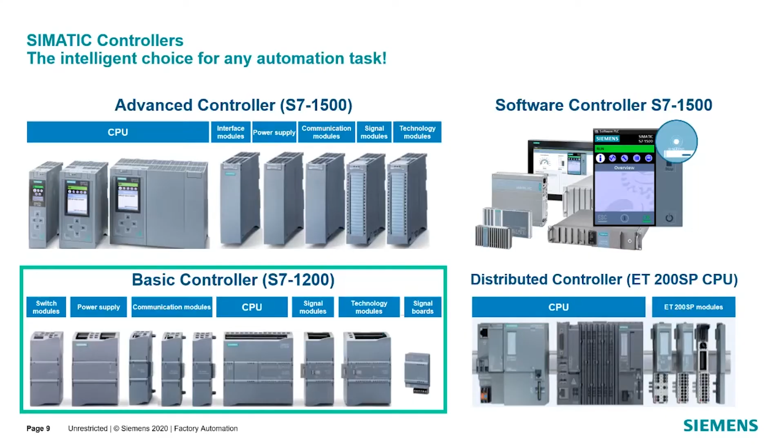Moving on to the key innovations that Siemens likes to focus on within their PLC family. We're going to real briefly talk about them here and then move on to a little bit more during the presentation. Main areas of focus include security, safety, and diagnostics and technology integrated into the platform through programming, the innovative design and compact size, and then most importantly with Siemens in the TIA portal, efficient engineering through the single engineering framework known as TIA portal, which is a programming environment for PLC, HMI, drives, SCADA, network, and smart controls.

When we look at where the S7-1200 sits in comparison to the other controllers within the Siemens controller family, it is on the lower end of the controller, but it comes at a very competitive cost point. Don't let it fool you. It is still a very powerful controller for its size and functionality. And it still goes down the path of the 6 features that Siemens likes to promote across their entire line. As you can see, it overlaps a little bit into the S7-1500 platform, and then you can see where the other 2 options fall within the 1500 environment.

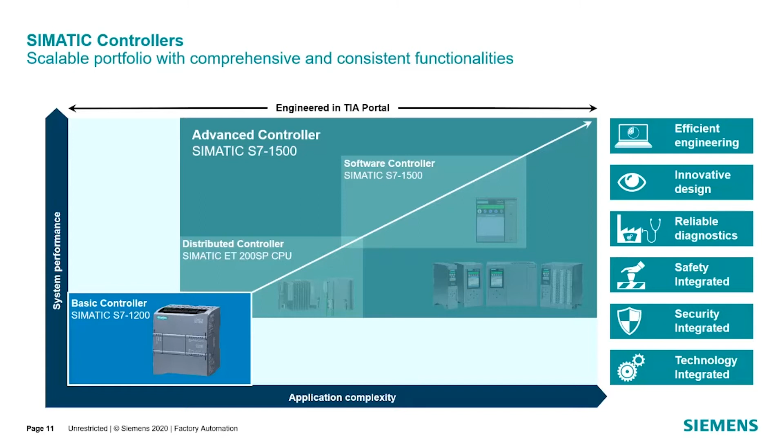Not going to go much into this other than to say that the 1200 is very versatile for a large range of market segments. It's extremely good for OEM environments, especially smaller machines that are not an extremely big amount of IO count, but it's also been used in applications from car washes and bowling alleys. One in particular I know that Siemens is proud of is it is the primary control system for Top Golf driving ranges, and it is what helps control all the systems at the individual stations.

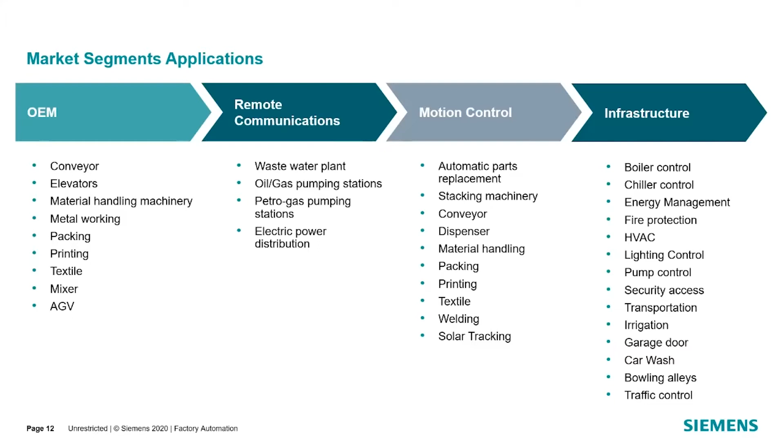Now, before we get too far into hardware, I wanted to just touch real quickly on the software for the SIMATIC controller platform. For the PLC side of it, the software is Step 7 in the TIA portal. There are two versions of it available right now. For the S7-1200 PLC family, Step 7 Basic would be all that you need. If you then step up into the larger controllers, whether it be the S7-300, S7-400, the 1500, or even the open or software controllers, then we would be looking at Step 7 Professional. I should also mention that Professional also covers the S7-1200 CPU. In addition, with Step 7 Basic and Step 7 Professional, you also get the HMI equivalent software, WinCC Basic, which is used to program the basic panel line of HMIs.

On all of these PLCs, just as there's Step 7 Basic and Professional, there is a safety equivalent of this for use with the fail-safe controllers. Safety Basic, once again, covers just S7-1200F processors, while Step 7 Safety Advanced covers the full line.

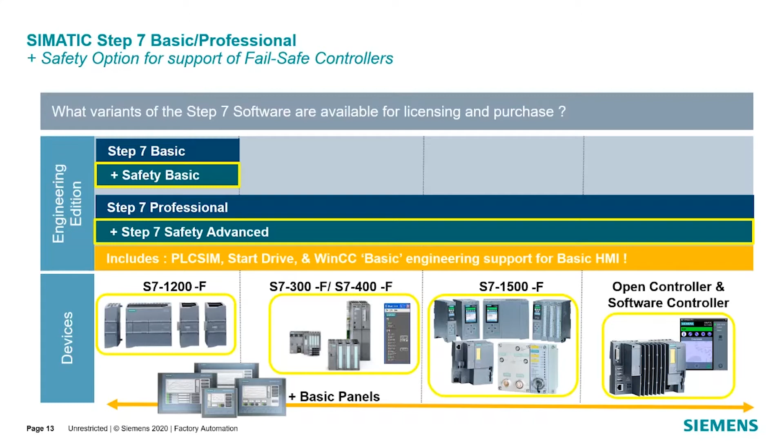When it comes to the design of the S7-1200 CPU, there are some features that are common across the entire family line. All of the CPUs have options available on the power supply, whether it be a 24 volt DC or 120/230 volt AC variant. The 120/230 volt AC variant actually has a small power supply in it additionally that will provide 24 volt for some field sensor supply for your IO.

All of the 1200s have a slot on it for a SIMATIC memory card. With the 1200, this card is completely optional compared to its big brother, the 1500, where it would be required. With the 1200, this can be used to expand the load memory of the PLC, or it can actually be used to store additional files and uses for things like the web server. And we're going to see that a little bit later during the live demo.

Additionally, the 1200 CPU has a trio of status LEDs for CPU status, including run, stop, error, and maintenance. It has LEDs for each one of the integrated IO built onto the PLC. And it also has status indicators for the communication port on the PLC.

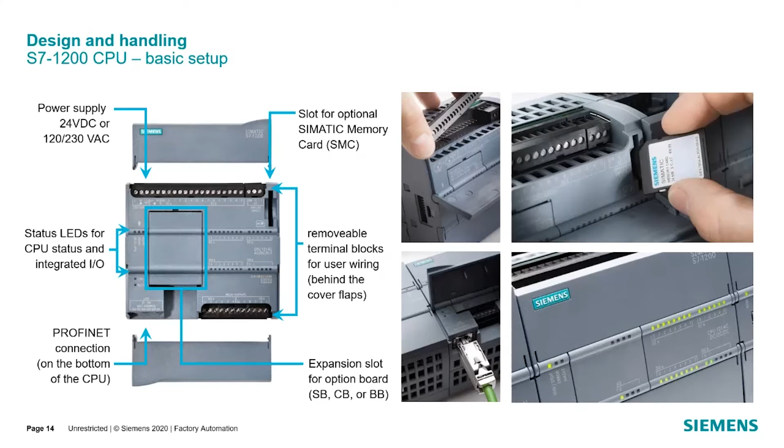And then finally, the 1200 CPUs feature removable terminal blocks that come standard in screw terminal, although push-in terminal blocks are now available for them that are conveniently covered behind cover flaps.

When it comes to variants of the S7-1200 CPU, there are five flavors that make up 13 versions of the processor. Majority of them, the 1211, 1212, 1214, and 1215 all come in 3 versions, and then the 1217 comes in a single version. Looking at those descriptions probably don't make a whole lot of sense, so I'll just quickly break that down for you. Before the first slash in the description, so if we look at CPU 1211C and the first one

DC/DC/DC, the first letters indicate the version of the power supply that is built into the CPU. So DC for the 24 volt DC version and AC for the 120 to 230 volt version. The middle section, at least at this point in time, will always say DC, as that is the indicator of the digital inputs on the unit. At this point, 24 volt DC digital inputs are the only option available on the centralized base. I have not heard otherwise, so for now, that's the best option.

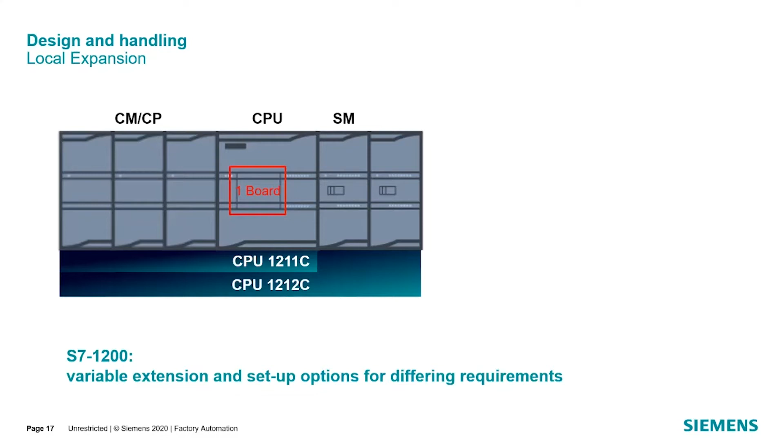That makes the 1211 a very limited CPU, but it is great for applications where a machine will never be expanded, and where the I/O count is where it will live forever, as there are cost advantages to that small CPU. Moving to the next size up with the 1212, we keep all of the expansion board options and the communication options, and we now add the ability to add 2 signal modules. And then finally, with the 1214, 15, and 17, we expand everything we've seen before now up to a total of 8 expansion modules.

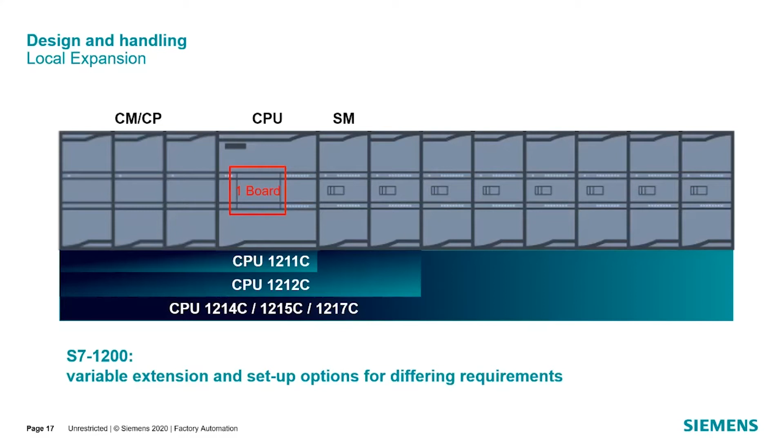A few other specifications to point out. The 1211 through 1214 each have 1 integrated Profinet port on it. The 1215 and 1217 do add a second port. It is not a separate NIC card. It just gives you a 2-port Ethernet switch with a single network adapter.

As you move from the 1211 up through the 1217, both your work memory and load memory do increase. Additionally, through the memory card, the load memory can actually be expanded up to 32 gigabytes for additional uses.

One of the other differences between the models is the number of integrated digital I/O on the model. On the lower end, the 1211 has 6 inputs and 4 outputs, the 1212 has 8 in and 6 out. The 14 and 15 both have 14 in and 10 out. The 17 has 10 in, 6 out, and then 4 in and 4 out that are for special uses.

Additionally, all 5 variants of the 1200 offer 2 analog input points on the PLC. They are a very basic 0 to 10 volt signal. So if you have a simple analog need, they're a great input. If you need good high resolution, I still would recommend an external signal module for it. Additionally, the 15 and 17s add 2 analog outputs.

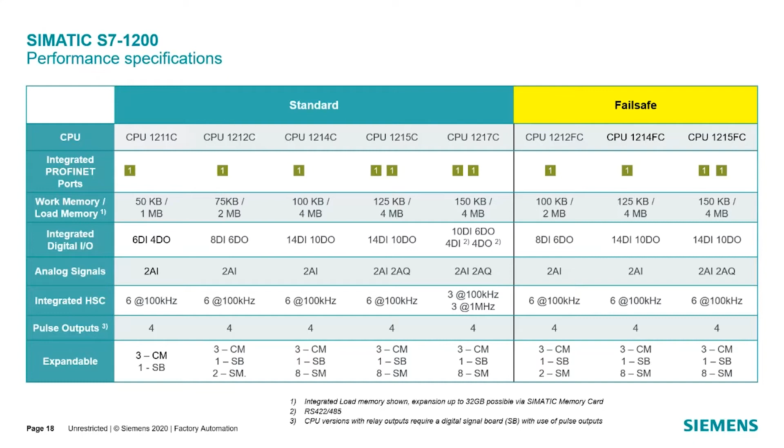A few more quick specs. The 1200 is rated from -20 to positive 60C when installed horizontally, or it's derated slightly to -20 to 50C in a vertical application. And it also has real-time clock buffering on it via a high-performance capacitor.

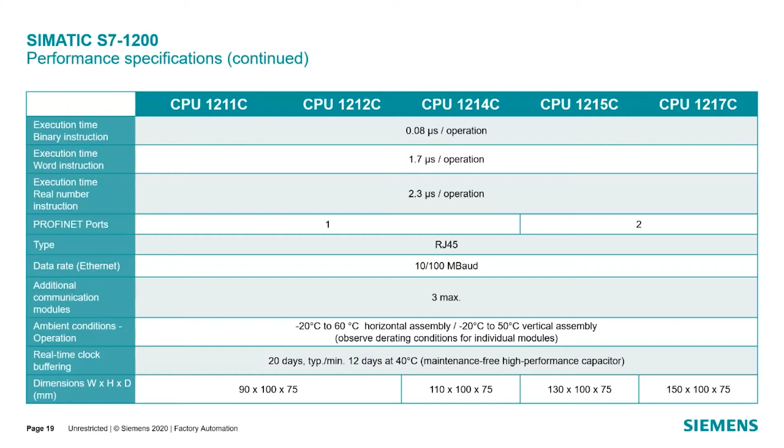Moving on to signal board options, starting with the onboard expansion slot, there are part numbers available for either 24 volt or 5 volt DC inputs, as well as standard analog inputs, RTD signals, and thermocouples. Additionally, there are output boards available in both 24 or 5 volt DC, or there are analog output cards available as well. There is even a hybrid DI/DO card that has two digital inputs and a digital output. The signal board is really designed as a method to add 1 or 2 extra points to your system without having to add an extra signal module.

When it comes to our signal modules, in digital inputs, there are versions in 24 volt DC in both 8 and 16 channels, including fail-safe I/O versions. In digital outputs, there are 8 and 16 channels, both in 24 volt and relay output, including fail-safe options. And there is also an 8 and 16 channel hybrid unit in 24 volt and relay output. Additionally, the hybrid model is the one opportunity for 120-volt digital inputs. At this point in time, that is the only module Siemens is offering that has 120-volt input on the units.

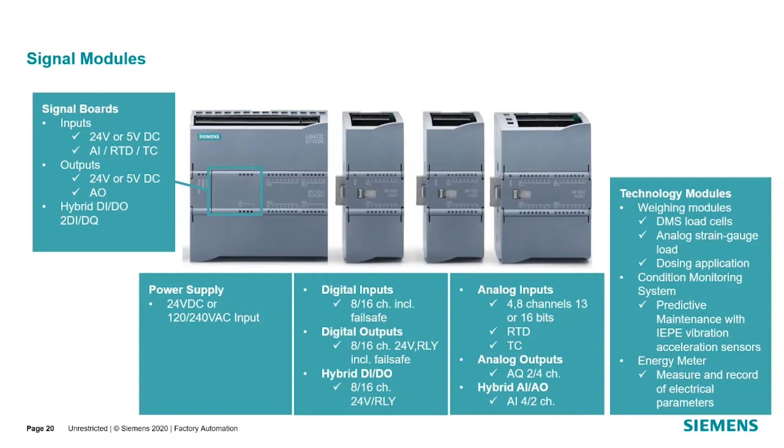Moving on to other modules available for the 1200 platform, looking at communication modules. The 1200 CPU has at least a single integrated Profinet port on board, which supports industrial Ethernet, Profinet, Modbus TCP, as well as software-based communications such as OPC UA, and direct connections to cloud systems and MindSphere applications.

When we look at the onboard expansion board module, there is an RS-485 interface available that can be put into that slot that would give you options for USS, point-to-point, and Modbus RTU communications.

Looking at communication modules plugging on the left side of the CPU, there is an AS-i module available, as well as modules for IO-Link and RFID communications. There are modules available to allow the S7-1200 to either be a Profibus master or a Profibus slave on the network. Profibus DP, I should mention.

There are also communication modules for RS-232, 485, and 422/485 serial communications. And then there are several serial teleservice modules available for phone network type communications.

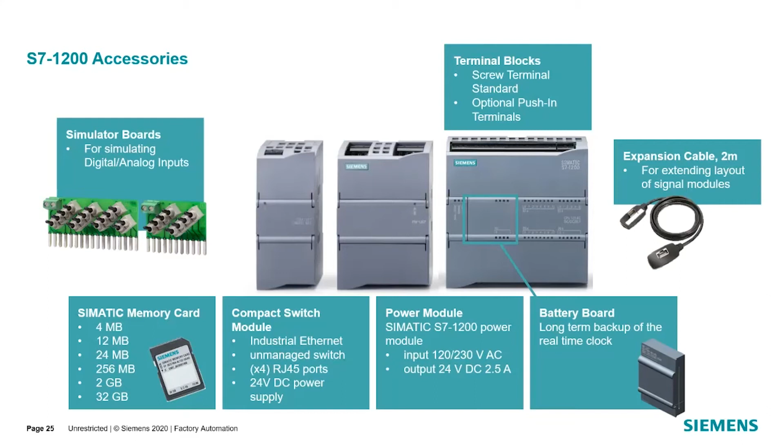Touching a little bit on some of the innovative topics, starting with security integrated, Siemens has implemented a variety of options through the hardware and software to help keep the system integrity of your PLC, whether it be know-how protection, copy and execution protection, as well as access and manipulation protection, and then secure communications through certificate type implementation.

Looking at a couple of the technology functions that are available on the 1200, there are several options for integrated PID controllers built into the 1200. They have fairly simple to use screens for implementing and connecting up a PID without a ton of extra programming. There is auto configuration to help you set up and tune your PID control loop once you have your physical connections, and then easy commissioning screens help you to see what's going on through the integrated trace function on the 1200 and the TIA Portal software.

Additionally, when it comes to basic motion control, there are drive objects for basic position and speed control of drives. Similar to the PID, they're very simple screens to get you started and step you through the options, but let you send drive commands out, whether it be over pulse train output on DC output versions, or whether it's PROFIdrive to a Profinet or Profibus enabled VFD, or even if it's via analog output signals.

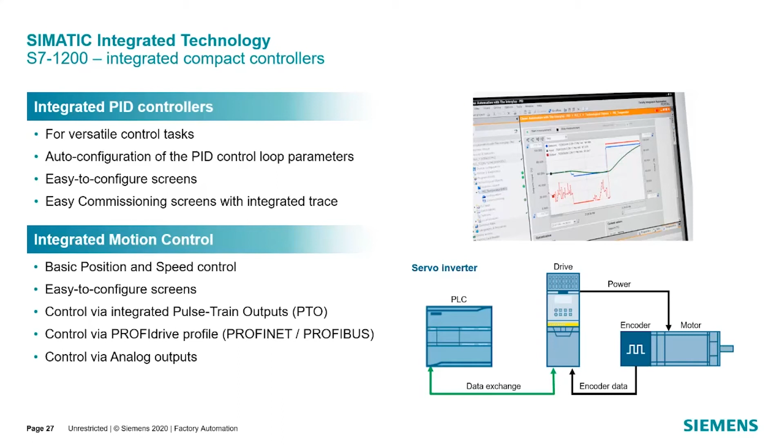Talking a little more about additional functionality, mentioning those modules from earlier, with the SM1281 module, you are able to implement a condition monitoring system using vibration sensors that can perform analysis of machine vibration and help you set conditions to determine when maintenance or equipment could be failing.

Additional modules within the SIWAREX line get into our weighing options with the WP 231, 241, and 251 for a variety of different weighing applications, whether it be load scales, load cells, belt scales, or even dosing and filling processes.

And then finally, with the SM-1238 add-on module, this gives you the ability to acquire electrical characteristics of single and three-phase networks up to 480 volt. This allows you to pull line voltages and take current measurements directly into the PLC using 1 amp and 5 amp CTs, and allows you to bring those kind of power and frequency applications in through that data.

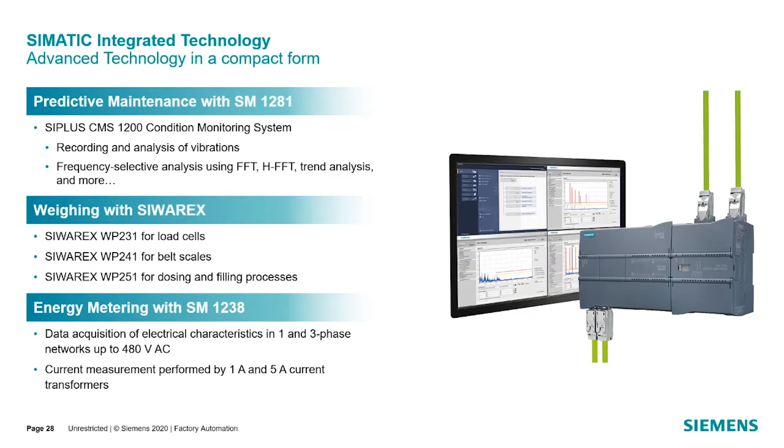One of the other innovations that Siemens is very proud of is their integrated system diagnostics. I know with most systems, traditionally, in order to get a lot of detailed information out of the CPU, you have to spend a lot of time creating alarms for that system. In the case of Siemens, it's really configuring it instead of programming it. By default, these alarms and diagnostic information is automatically available. As you change hardware components or add hardware, it updates without having to change anything in the system. And these diagnostics are available even if the CPU has gone to stop.

The diagnostic provides detailed, clear information and is accessible from within the TIA portal itself while connected to the CPU, through the internal web server of the processor, through a connected HMI in the system, or through the SIMATIC automation tool. And we're going to see that a little bit when we get to the live demo portion in a few minutes.

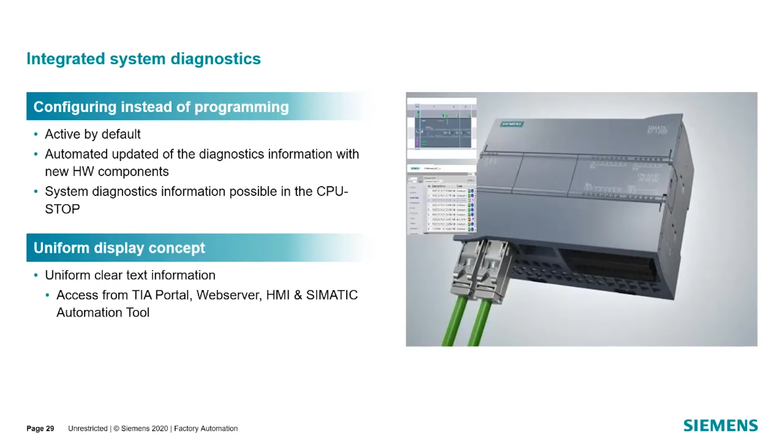And then finally, when it comes to features, is safety integrated. Siemens has come up with what's probably one of the smallest and most cost-effective combination standard and safety PLC in one controller. It is ProfiSafe integrated, so it can talk safety over the network. It is TUV certified up to a SIL3 application or PLe.

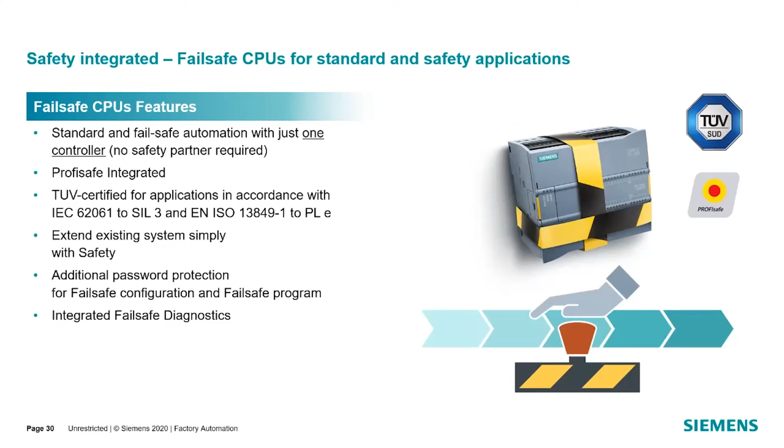It makes it very simple and cost effective to extend an existing system simply with a safety processor. It adds additional protections through password for both the fail-safe configuration and the program, and it also expands the internal diagnostics with fail-safe safety data. The one note I will mention with the fail-safe CPUs is that the onboard I/O is not safety rated. It is still standard rated. So in order to get safety rated I/O, that would have to be accomplished through signal module expansion.

If you're interested in getting started, Siemens offers several options in starter kits for a quick and easy way to get started. The QR code in the middle will take you to a Siemens site that shows you the various options that are available. But just real quick, high level, all of the kits come with an S7-1200 CPU. They come with one of those input simulator cards with some switches on it. They come with a copy of Step 7 Basic for the 1200, and they come with an Ethernet cord. So you have everything you need, short of the laptop or computer, to get started.

Other options within the starter kits include a couple different variants that include different sizes of the basic panel HMI, which software is already included as part of Step 7 Basic. And then there's also a couple options that get you a safety PLC, the appropriate I/O, and the software that is needed for it.

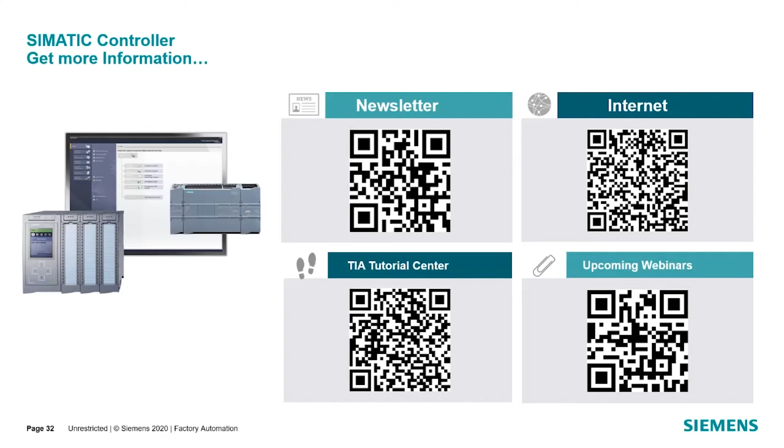And with that, I'm going to real quick switch over to my camera so I can show you the demo, and then we'll take a look at the web server functionality.

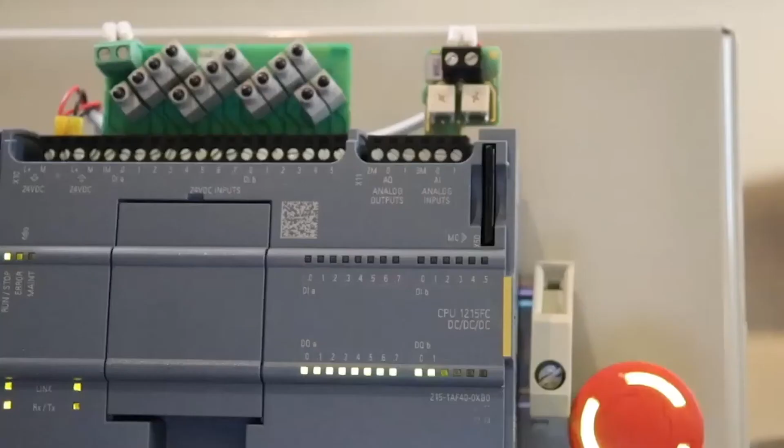Okay, there we go. What I have here is a Siemens S7-1200 demo. It is a CPU 1215 FC, so it is a fail-safe safety processor. It is a DC variant, so it has 24-volt DC inputs. It has 24-volt DC outputs, and it has a 24-volt DC power supply.

As you can see by the labeling across the top, the power comes in on the top left, and the terminals are well labeled depending on their grouping all across the top. We then have the analog output and analog input locations on the top right. Off to this side here is the SIMATIC memory card. This demo does have a card in it to show some of the web server functionality and some of

the additional information. In the bottom right, we have our DC outputs, and on the bottom left, we have our Profinet port. Because this is a 1215, it does have the 2 ports on it. You can see Ethernet status, PLC status, output status here, and then as I turn things on, you can see input status across the top.

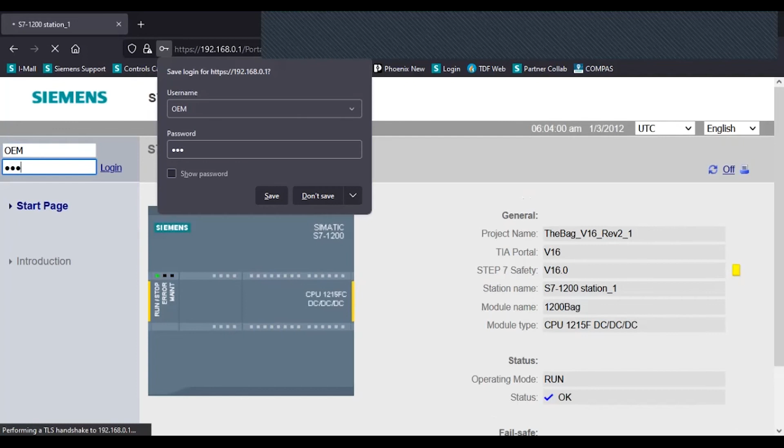That being said, I'm going to log into the CPU. This information is set up in the TIA Portal project. Now that I've logged in, it actually gives me a few more options on the main page, including being able to stop the CPU. And additionally, if you're not sure which CPU it is, you can also flash the LEDs on the front of it. It's a great way to identify the CPU if you have an application where you have multiple and you're not sure which one it is.

Let's see. Looking first at one of the things we talked about, I want to show the diagnostic buffer. This information is available if you're connected to it inside TIA Portal, or if the web server is enabled, you can get this information without even having the Portal software. As you can see, somebody needs to set the time on this PLC because we're off by a few hours. But as you can see where I just set the PLC to stop, I have incoming events that show that the CPU has been requested to stop, and has gone to stop.

Now, that being said, one of the things I mentioned earlier was that the diagnostics still work even when in stop. So what I'm going to do, I have an eStop hooked up on this demo that is connected over Profinet. It is a Profinet enabled eStop device. I'm going to unplug the Profinet cable, which causes an error in the system. I've already gotten an error. I immediately get an error light on the CPU itself.

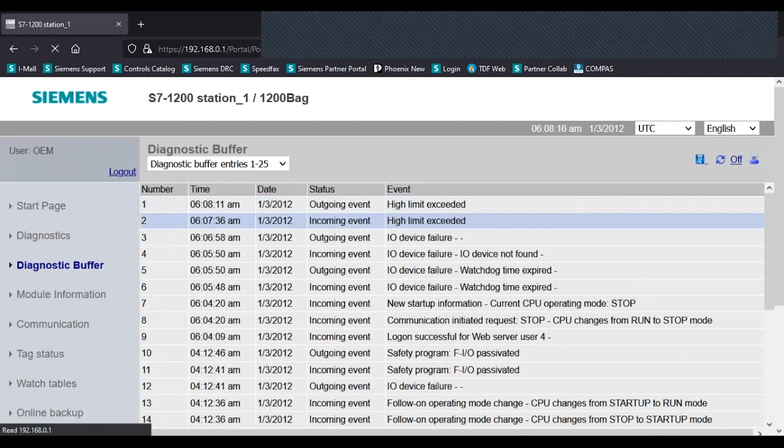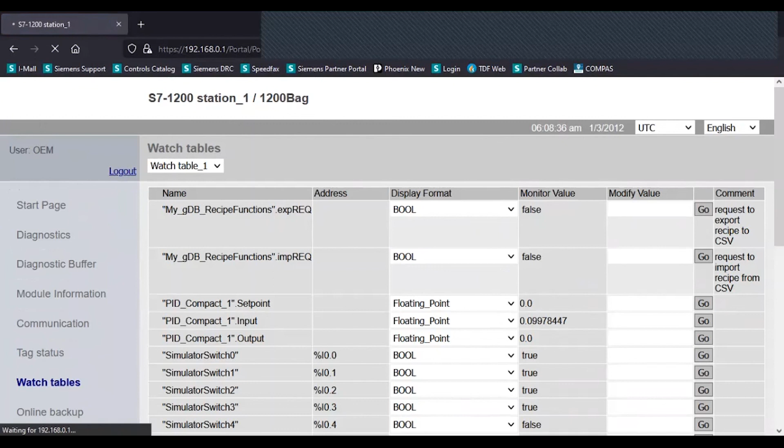I'm going to go back and put it back in run now. Some of the other functionality within the web server that you can look at is watch tables that you can define within the portal software with information on I/O. It is not a high speed, real quick response, but it's a good way to be able to check it. As you can see, I still have my 4 switches on from earlier. And if I turn switch 0 and 2 off, it will refresh in just a second and you will see that those are off.

Now with the watch tables, these have to be predefined in the program when you are writing the code. But one option you don't have to pre-program is we can go to tag status and enter a specific address or variable. In this case, I'm going to enter I0.0 and it tells me that it is false. I can also turn it back on. I click refresh here and we can see it's on. I can turn it off, refresh, and I also have the ability to modify it temporarily here.

And it will modify for 1 cycle. These are not force tables. So if there is something else within the code, whether it is hardware or software, that is overriding this input or output, it will go back after once.

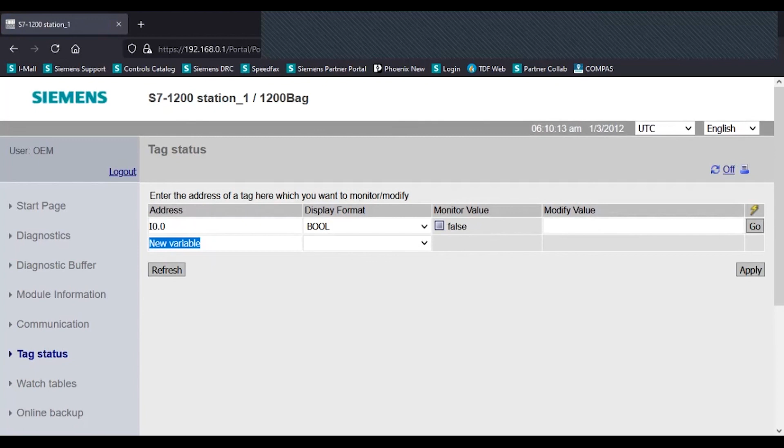Additionally, if you are HTML savvy, the web server also has the ability to run basic web pages on the device. Sorry, it's taking a second to load here. Okay. In this case, this is just a little PID simulation. Let me see if I can... There we go, where we can see it all a little better.

Right now, because it's off, it is tied directly to the potentiometer on analog input 0. I'm going to, if I can get my screwdriver on there, turn it up a little bit. I can't. Hold on now. There we go. Turn my set point up. And as you can see, the internal simulation is bringing it in line through the PID controller back to the set point.

Additionally, they have it set up where they can switch the control source signal for the PID simulation by turning this on and setting a set point with a slider. And we can see how that also works.

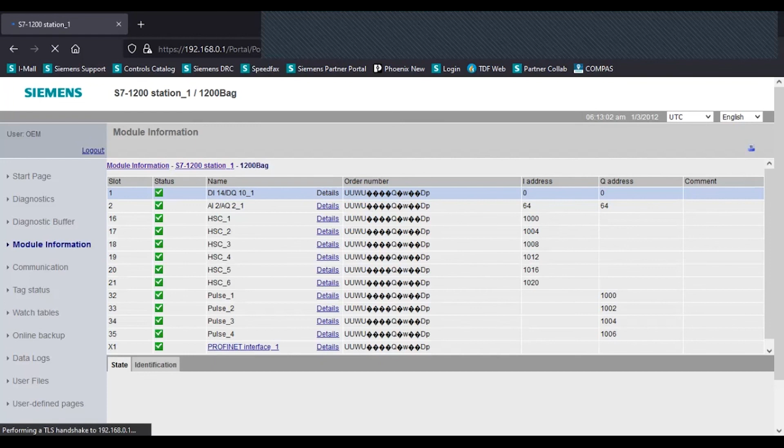You also have the ability, if the web server is enabled, to update the firmware of the PLC. Once the file is downloaded from the Siemens support site, it can be brought into here and then updated. Additionally, the web server allows the ability to create a backup of the CPU, which then could be restored to another CPU if needed.

Hold on a second. My computer did not like that I tried to share that. Sorry. There we go.